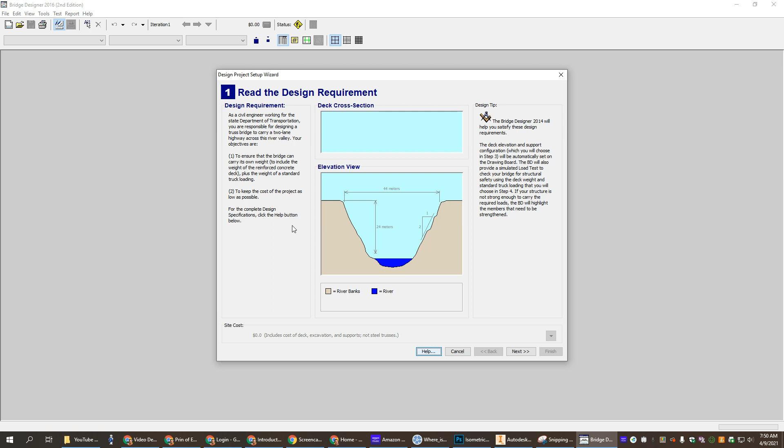Okay, and this shows you can change a lot of different things with your bridge. We're just going to click Next through this first time through. We're not entering a local contest, so say no on this screen, click Next. On this one, you can change your deck elevation to a lot of things. You can lower it, but you'd have to cut away things. For this first try, we're just going to start at the very top.

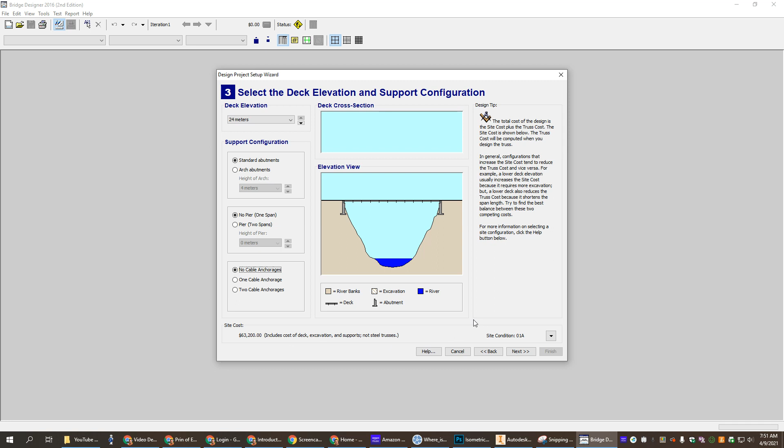You can change your abutments to have an arch or a standard. We're going to stick with standard. You can add piers in the middle. We're going to just leave ours standard for this first one. These are all things you can change when you design your own. And then you can add cable anchorages if you want. So there's a lot of things you can change, and you notice it's charging me for the bridge because we have just a basic bridge, so the cost is going up right now as we add things.

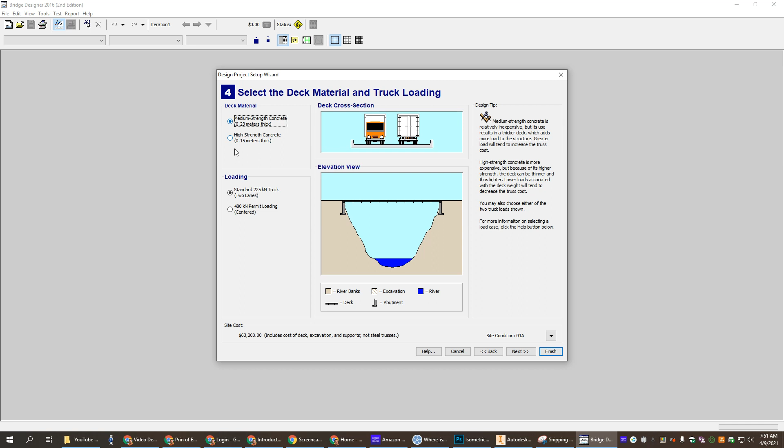We're going to put it where we're going to have trucks going side by side like this. We could do it with just a single. We're going to stick with the two. We can change the type of concrete, and you notice when we change the style of concrete, whether it's medium strength or high strength, you gain something by making it thinner, and it might be lighter. But if you look at my cost, it goes from 67 down to 63,000 when I change it back to the medium. So everything comes with a cost.

And again, when you design your own, you'll be able to change some of these things to try to improve the cost while still making a structurally sound bridge. But again, we're just going to stick with what they give us for this first try through. Okay, so click Next again. We're going to do a through truss, and we're going to start with a Warren. Okay, and you can see it gives you that. You can see if you change. But for this first one, we're going to do Warren.

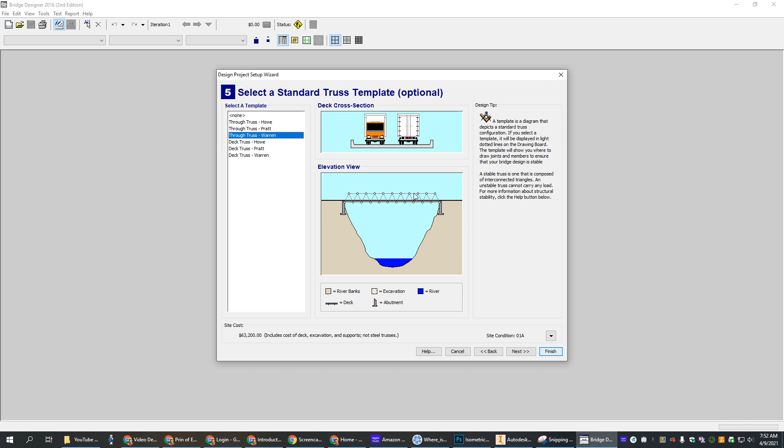A deck truss is where it's built underneath. Okay, but we're going to go with the through truss Warren for ours. Again, when you're building your own, you can change what you want. You can see the price really hasn't changed yet for us on this one, but sticking with Warren so far. Here, you want to put your name for who it was designed by. And then project ID, this is just your class period number, so maybe you're in third period. Click Next.

It just tells you some things about how to design, and then you click Finish, and it will set up your design. Now they went ahead and put where you're going to make joints here on the bottom. You have to add the joints to the top. So over here in the tools, you have the joint tool selected. You just have to put a joint. So just put a gray dot everywhere there's a circle. Once you have all those filled in, then you're going to go add the members.

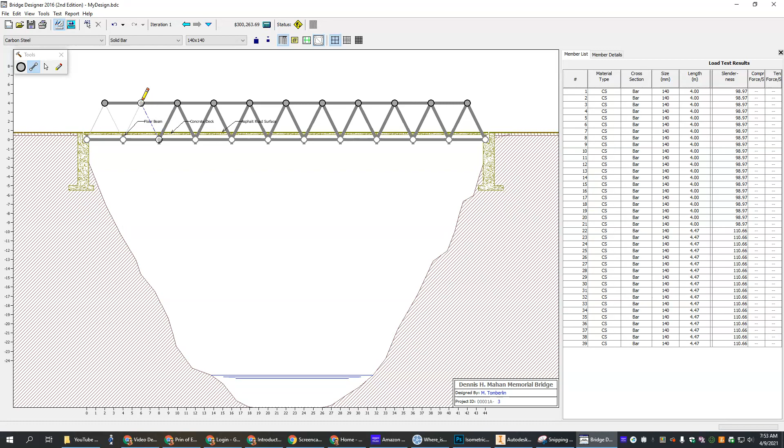If you're going across a bunch, you can just do them all at once, and it will know those joints are there. That'll save you time, and then it takes a little bit of time because you have to draw each one of these individually. I'll do this really quick so we can move on and show you the next step. Okay, and you notice every time I add a beam, my cost is going up. If you look up here at the top, you can see the cost. Each one of these beams is like $6,000 to add. Okay, so there is my bridge. It's good enough, right? It's holding up, it looks great, but we've got to test it.

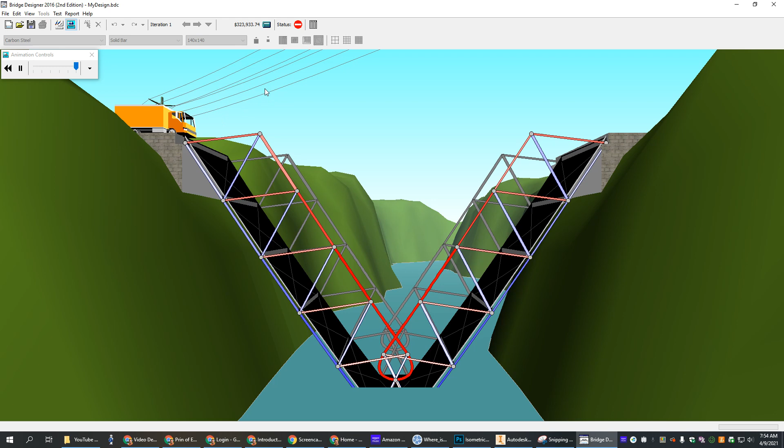So up here at the top, it's the fifth one in. It shows the drawing board, which is where we're at. We want to look at run the load test. Okay, so we're going to run this load test. Puts it there. Oh, it doesn't even survive the truck that's going to be coming along. He's like, not going through there. Okay, so it doesn't work. See, the status was bad.

So we're going to go back to my drawing board, and now it tells me, look, these are the ones that failed. They put the little lines on them. And over here on the right-hand side, you can see where they failed. Now it shows us forces in compression and forces in tension. Okay, so you can spread those out just a little bit so you can see those.

If it has a number under compression, that means it's in a compressive state, and we'd use one type of beam. Usually a hollow tube works better for compression. For tension, you can see those have numbers. Some of those have 0. So where there's numbers on the compression side but no numbers in tension, it shows that beam is being squished, compressed, and not stretched or put under tension.

So if we go over the number 1, that means it can't handle the load. Anything under 1, you see how these aren't highlighted here or there. We need to change those and make them bigger. So we could change all of these right here. First, they're all bars.

Tubes are usually better in compression. So we can go over here and change this solid bar to a hollow tube. Once we've done that, we can try this again. Did that make a difference? So we go back and run our load test. It didn't do any better.

So there's other things we have to change. You notice, look, they went way up. So maybe we just have to make those bigger tubes. Let's make them much bigger tubes and then run that thing again. Okay, still failed, not quite as quickly or as badly. Let's go back and look at our numbers. Still higher.

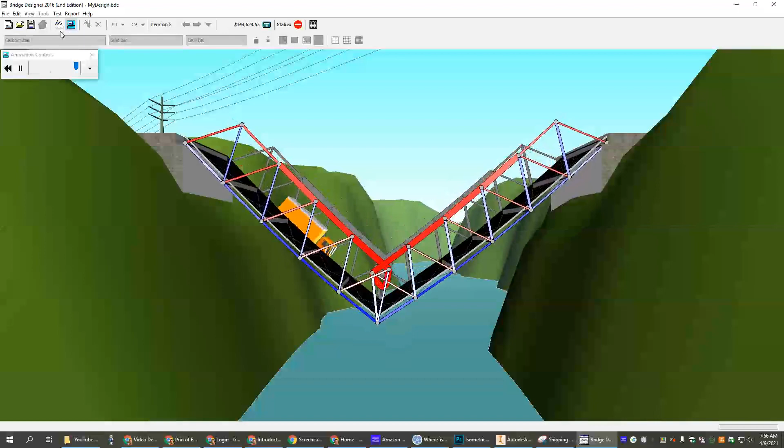So it's just going along, testing as we go, and seeing how things work. Oh, I got a little closer that time. We're just barely over, so maybe we just had to change these 4. Let's make those a lot bigger.

We just want to get this done so you guys can see what happens. We made them huge this time. Did that help? Oh come on, bridge. Oh, he was so close. Now look, another bar broke. So we fixed those, but that put too much stress on these guys.

So now we can change these, right? I'm trying to just get it to work one time. You can notice here, there's things in red and things in blue. As the truck goes across, you notice how some of them change their colors a little bit, showing what's in tension and what's in compression. And we survived, yay! So the compression ones are red and the tension ones are blue.

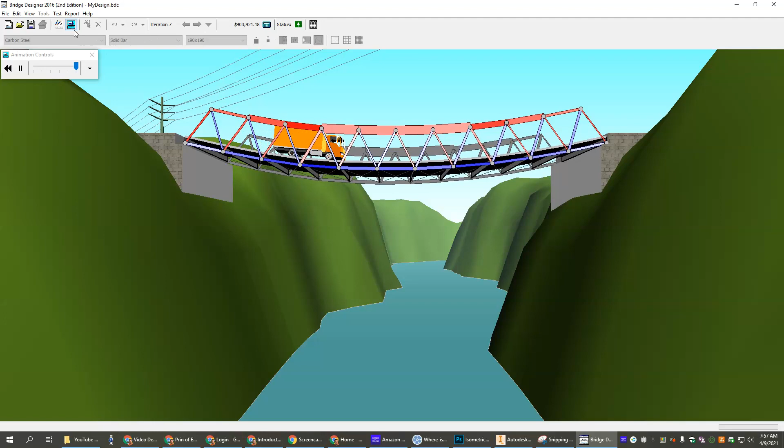So we can now go change things around. But look at my cost, it's $403,000. Making those tubes bigger makes those things more expensive. Yes, we have a working bridge, but nobody's going to want to pay for our bridge because some other company is going to make a much cheaper bridge that still works.

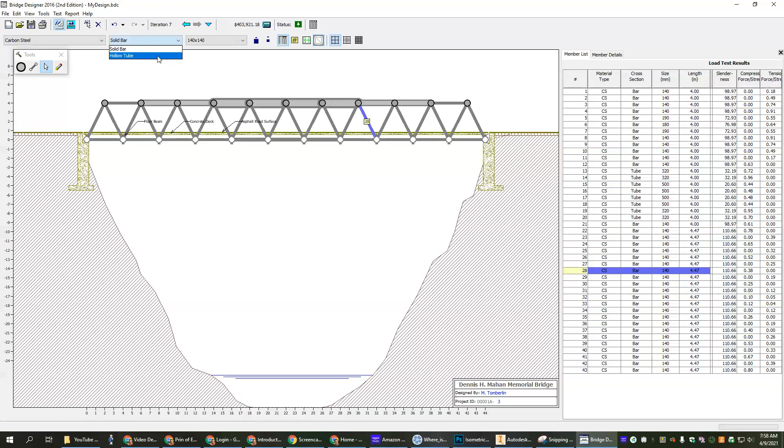So now your job is to make this as cheap as possible. Try to change all the bars into tubes if they can. This bar is under compression, so we can change it to a tube because tubes are usually cheaper. Watch, when I make this a tube, I went from 403 down to 400,000 by changing one thing. And if I run it... oops, now it's going to die, so we've got to fix something else. But we're saving money. So maybe a tube that's a little bit bigger is cheaper than a bar that's skinnier.

So you just have to play around with this until you can get a bridge that works. Our goal for this first one is to get under $300,000. So we've got some work to do. But you can see how we change things back and forth.

When you're building your own, you can change a lot of different things. You can change what it is, what kind of steel. You can add a pier in here - what if we had a pier right there? Wouldn't that make it much easier because we'd have another support? We could cut our bridge down and only make it this long. If it's shorter, it won't take as much load, but it's going to cost us a lot of money to dig away that dirt. So it's a trade-off: what makes it a stable, good bridge, and what does it in a cheaper way?